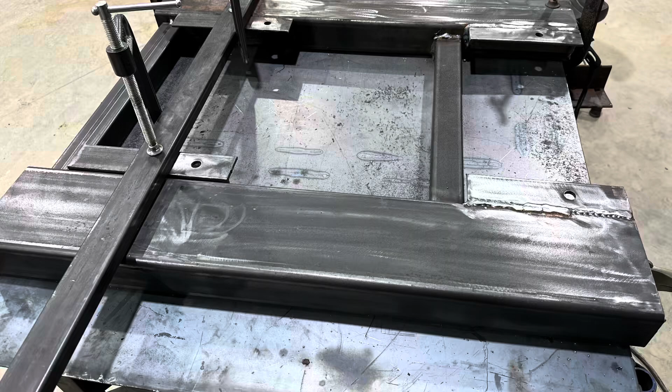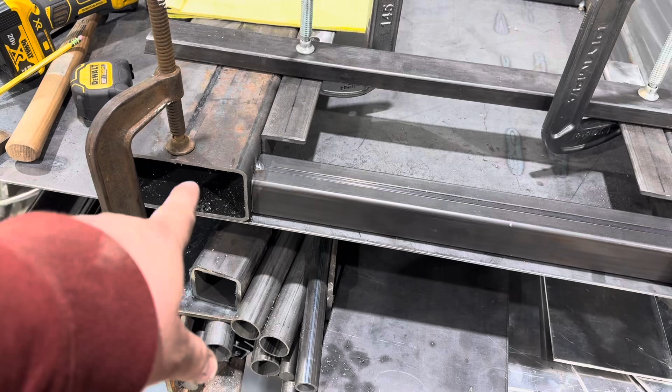Hey everyone, I wanted to share what I came up with for a design for a pallet fork compatible welder generator skid. So I started with 3/16 3x6, and 3/16 2 inch by 2 inch square.

And I think these are quarter drops. Nope, they're 3/16, they're 3/16. These I just had sitting around. I specifically found this piece and then these to work for this.

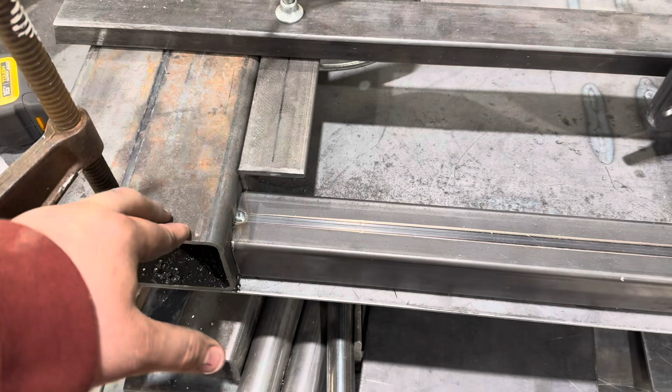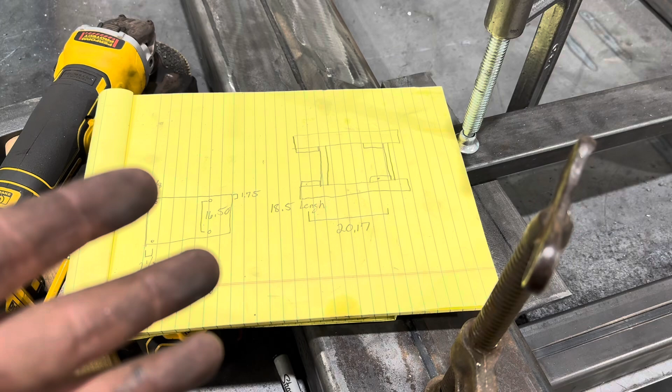Now, I'm not telling you have to do it this way because there's 10,000 different ways to build almost anything, but I wanted to share what I came up with in case someone either bought a welder generator or were asked to build a skid for a welder generator, or maybe you have something else you want to build a skid for, maybe like an engine-driven air pump or something like that, maybe a big toolbox, or maybe it's a welder that isn't engine-driven.

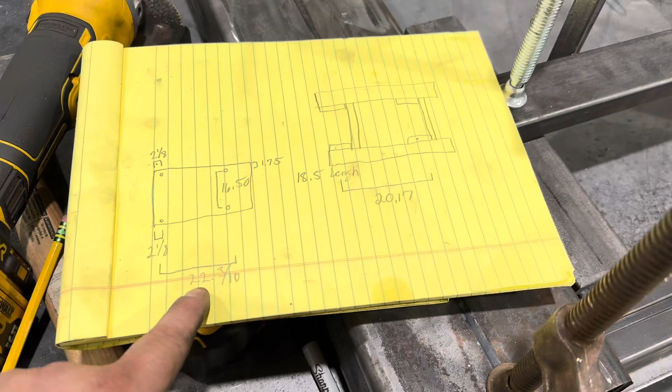So what I came up with was I wanted to have the two skids at a reasonable width. In my case, my hole dimension on this machine is 16.5 wide, and it is 22 3/10 long from half inch hole to half inch hole.

And I'll post the actual schematic from them, I just wanted to draw something while I was thinking about it. These are 2 inch pieces of angle, so half of that is 1. So that works out to 18.5 inches width here to here, and that's what this piece is for at 18.5 inches. Same with one right there.

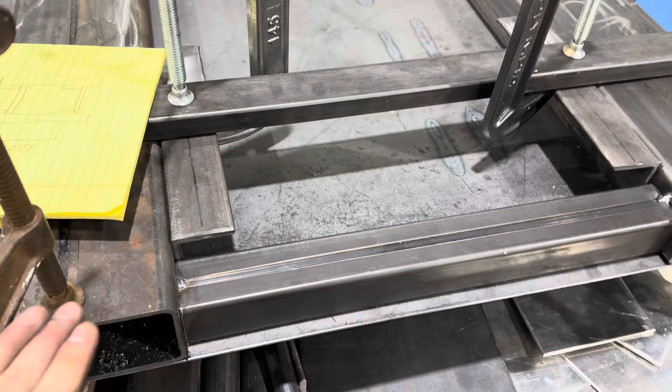This whole structure, considering once you bolt it together underneath the machine, and the machine itself should have structure of its own, this should be ridiculously strong, relatively low profile, and shouldn't weigh too much. Now, the biggest problem I'm going to have is getting paint to adhere to it.

Now, one thing you might want to consider is how are you going to bolt this thing on? As you can see here, with this piece in here, I can't fit my hand through here once the machine gets on top. And because of that crossbar right here, I can't fit my hand in there either when the machine gets on top.

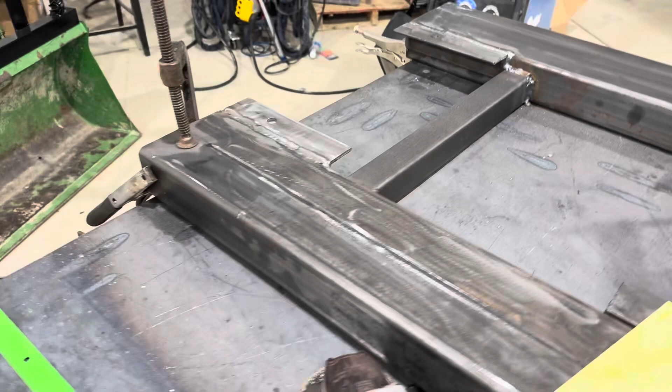So what I'm planning on doing is bolting the rear down by setting the machine down on top of all this and getting the rear bolts in here loose, and then lifting everything up and holding up at the front and putting in the bolts from the bottom. That's what I'm planning on doing.

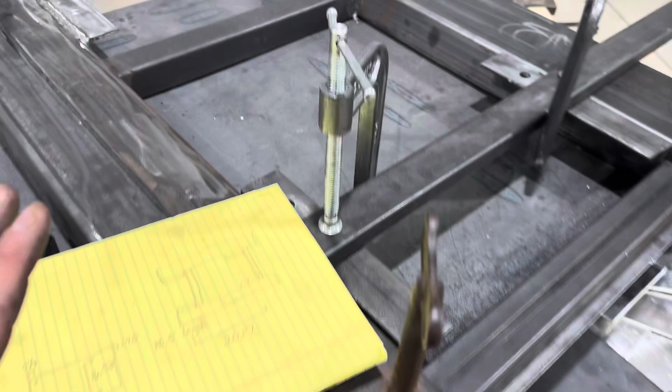So something you might want to consider when you're building something like this is make sure you know how you're going to put it together when it's done, because you could build something and build yourself out of the ability to use it. So something to consider when you're building things on your own.

Now, I'm not sure if you can just buy a metal skid for a welder generator. I do know they make carts, but this is how I want to do it, so that way I can carry it around on the end of the tractor, and also so I didn't have to be on a truck. I wanted it to be able to stand alone.

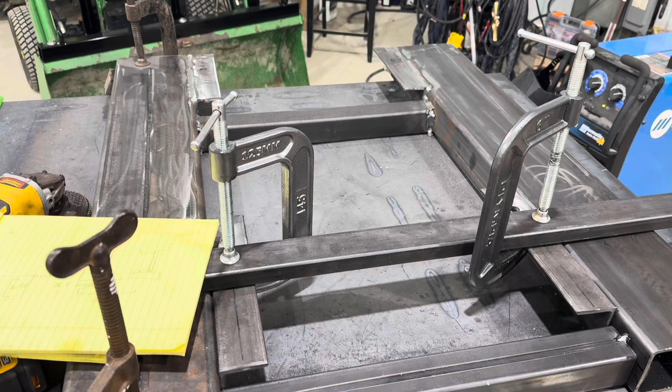Now, some people put it on a trailer. I don't want to deal with having to hook up a trailer to go do something, so I wanted to make a skid. I can either lift it with the lifting hook and set it in the back of the truck, and I'm going to put tie downs on here to help me hold this thing down, or I can put it on the end of a tractor and then have a welder tractor.

So that, or a generator tractor, keep that in mind too, because it's a welder generator. So we can have multiple jobs done by one piece of machinery.

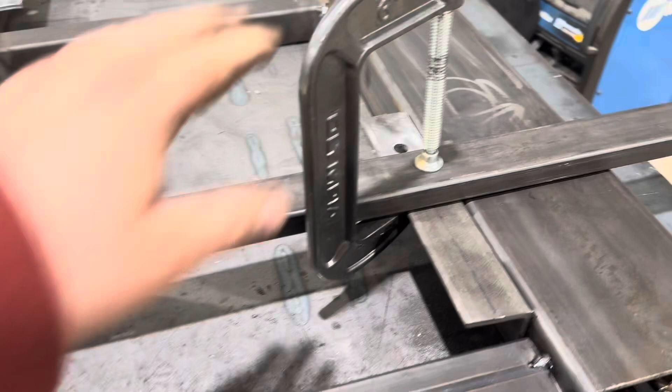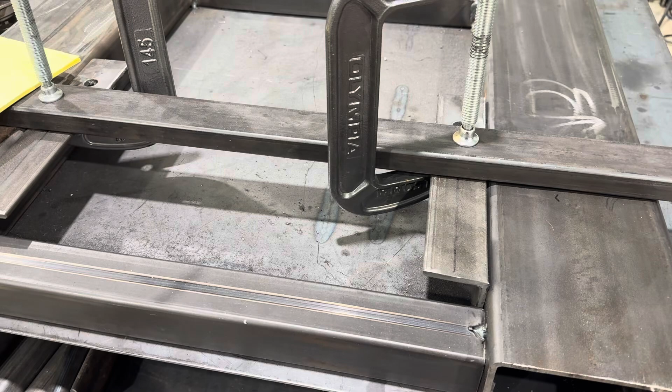What I did was I clamped down these to set a distance and measured everything, squared everything up using the table. Then I started building out from there using clamps, and I'm using clamps and suspending a piece down here to make sure everything's flush when I go and put this onto here so that it's not sticking up super proud. It probably doesn't matter if it's off a little bit, but too much might be a little bit excessive because you really kind of want to have the machine sit down on things.

Now we have, did I write that down? It's in the schematic. I think it's 1.75 right here. 1.75 is where the edge of the machine is going to be. So if this is an inch, the edge of the machine should be just barely sitting on this pallet, or the fork pallet tube area, the 3x6 pieces here.

Now I am planning on making some arms for ground and electrode wire holders, as well as perhaps a toolbox or something to keep extra things, and maybe a spot to keep wire or rod. So I may come up with something. I specifically want to come up with something for this that is utilizing this outer portion so the welder doesn't go to the full edge.

Now the other thing is too, my welder is 36 inches in length, front to back. These are 38 inches. So I have approximately 1 inch on the front and the back to protect the front and the back of the welder. And of course, welders are usually tapered and funny dimensions and whatever. So this should fully encase and protect the welder from things like carrying it through the woods and hitting a tree. That would be the hope. The skid will take some of the impact.

I just wanted to share what I came up with, not because you should do it my way, but maybe give you something to think about. I tried to look up some videos on people building this stuff, and I'm just not really seeing what I was trying to do. So I wanted to make a video showing other people, if they're looking for a similar thing, that they can draw some ideas from it. Maybe you want to do this a little bit differently. Maybe there's something you want to change, but at least it gives you an idea.

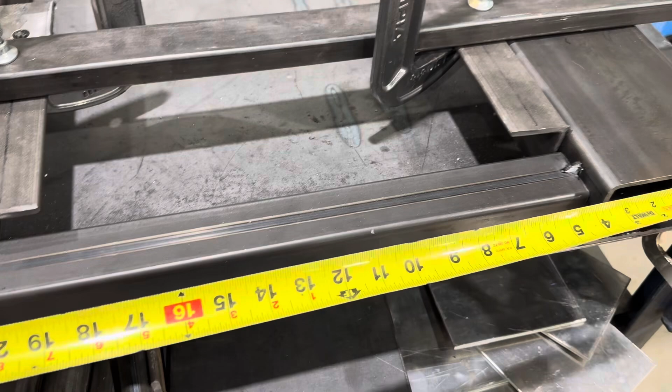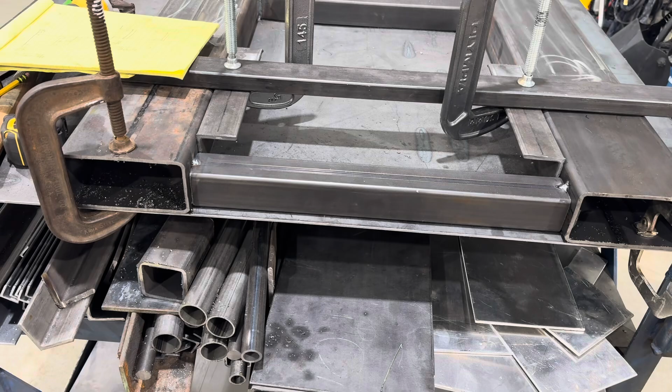And I didn't measure this because, of course, I have adjustable pallet forks. So I'm not that worried about an exact measurement. But center to center, we're about 24, 25 inches on these. I just figured it sounded like a good round number, and more importantly, it's built around the welder itself. So the dimensions of this was set by what's going on top of it. I think that's plenty wide enough. We're not going to have any torsional issues going on here.